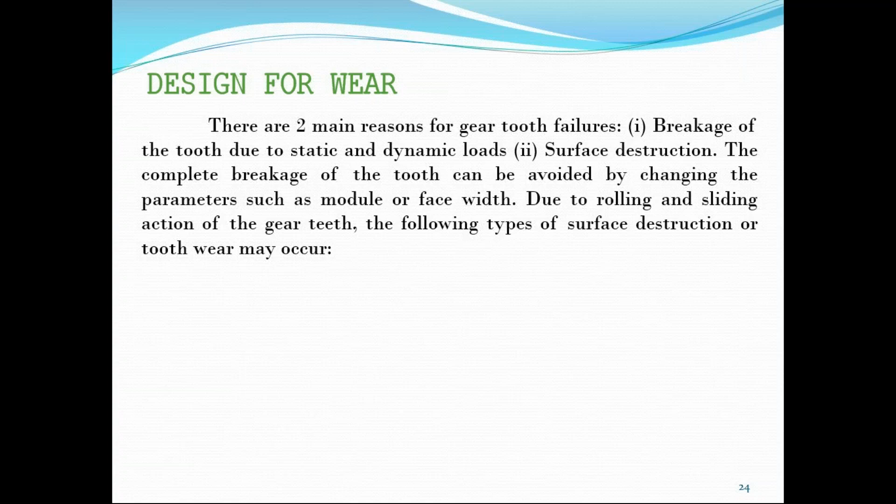So which are those things we will get? The first one is abrasive wear. This is failure due to the presence of foreign material in the lubricant that can scratch the tooth surface. This can be avoided by proper usage of the lubricant, meaning there should be no foreign materials.

Next one is corrosive wear. This is a failure due to chemical reaction on the tooth surface. This one also we can reduce by making sure that whatever lubricant we use will not react with the surface of the gears.

Next one, pitting. It is a fatigue failure due to repeated application of stress cycles. This is very difficult to reduce. And the last one is scoring, which is a failure due to metal contact caused by the breakdown of the oil film.

This one also we can reduce by changing the lubricant at regular intervals of time. But pitting is very difficult. So the failure of the gear tooth due to pitting occurs when the contact stresses between two meshing teeth exceed the surface endurance strength of the material.

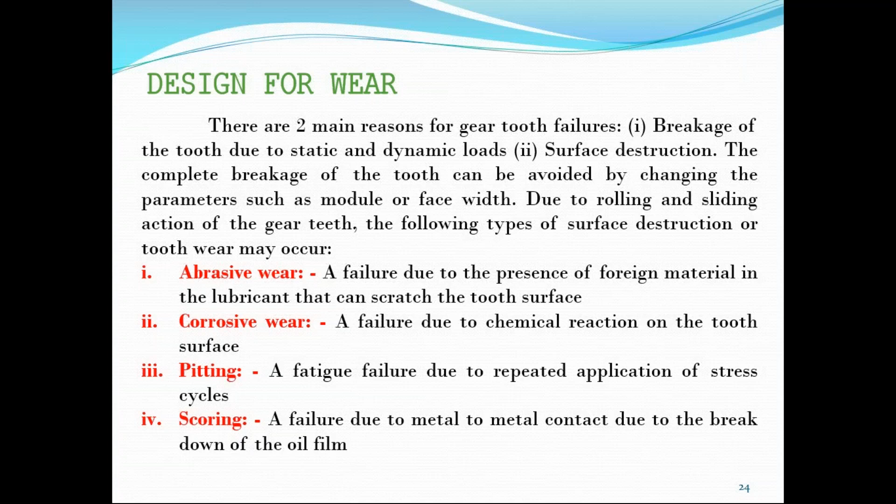So Buckingham analyzed the wear strength and gave an equation. According to Buckingham, for wear strength of the gear tooth, the equation is Fw equals D1 small b Q into K. I am using Design Data Handbook Volume 2 by Lingaiah. In that, this equation is 23.160.

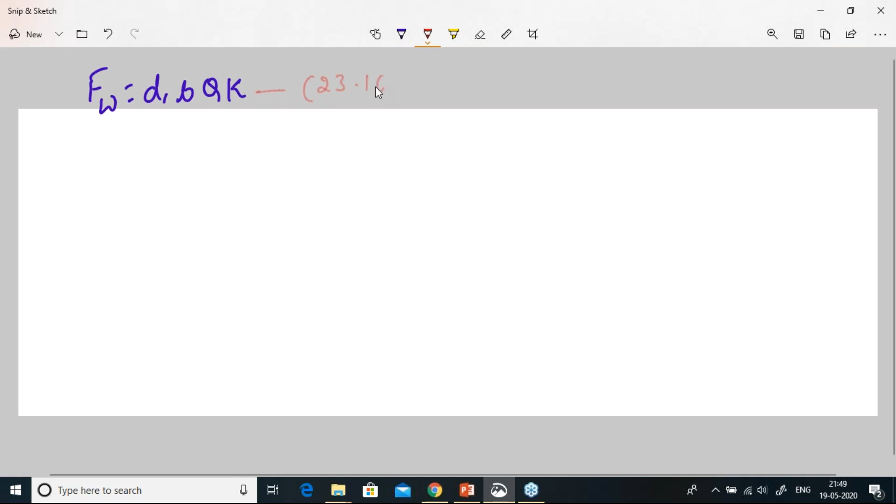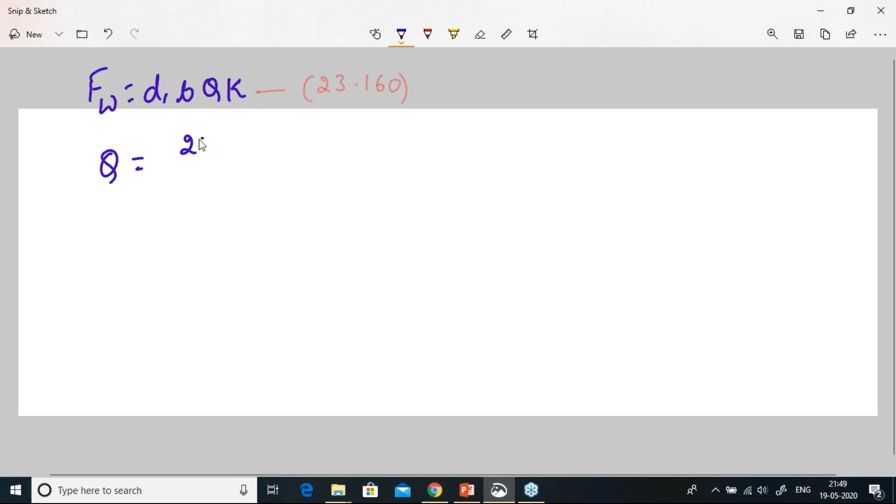In this, D1 is nothing but the pitch diameter of the pinion. Small b is the face width of the gear. Q is a ratio factor, which equals 2 times Z2 divided by Z1 plus Z2. This one also we have in the data handbook, equation number 23.163. Here Z1 is the number of teeth on the pinion, and Z2 is the number of teeth on the gear.

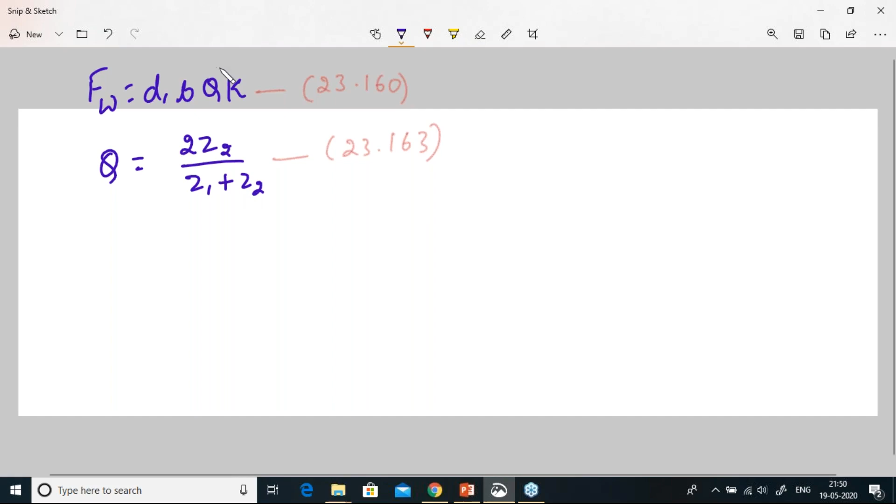Whereas the last one, K, is the load stress factor, which equals 1.43 times sigma FAC square into sine alpha, divided by E naught. This is equation number 23.161.

So in this, E naught is called the equivalent Young's modulus, which equals 2E1 E2 divided by E1 plus E2. This equation is 23.162. Here E1 is the Young's modulus of pinion, and E2 is the Young's modulus of gear.

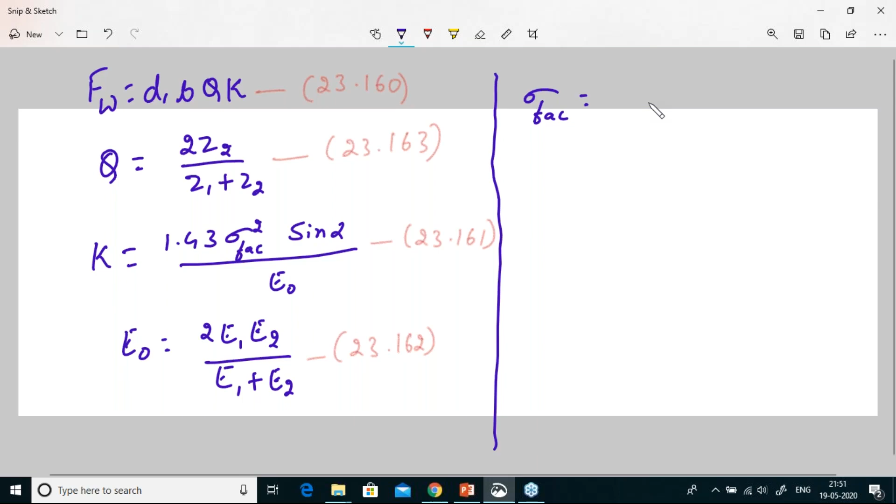Alpha is the pressure angle, and sigma FAC is the surface fatigue strength of the gear material. This can be calculated with the help of the equation 2.75 times H suffix B, HB, minus 70. This equation is 23.168.

So HB is nothing but the average value of BHN for the gear pair. By calculating all these things and substituting in this equation, we can get the value of FW. Always FW should be greater than FD, that is dynamic load. Always wear load should be greater than dynamic load.

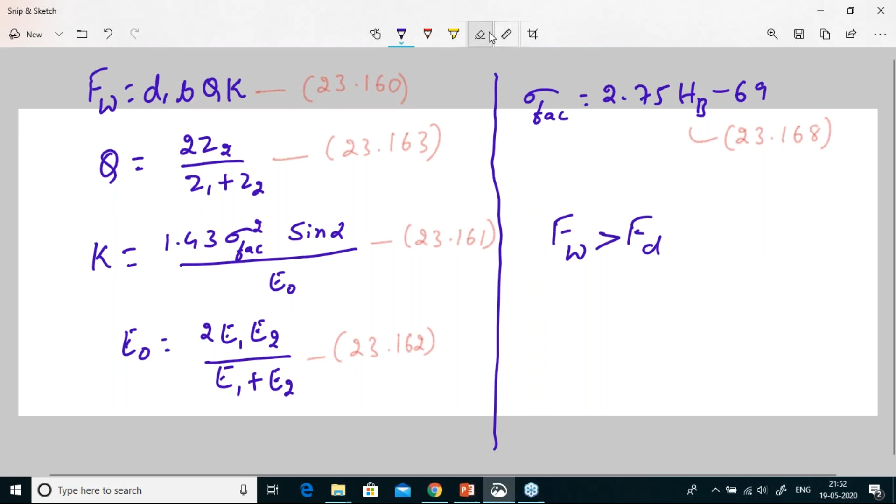If FW is less than FD, then pinion and gear materials are not hard enough, and we have to treat them properly to increase the strength of the pinion and gear. This is about wear load.

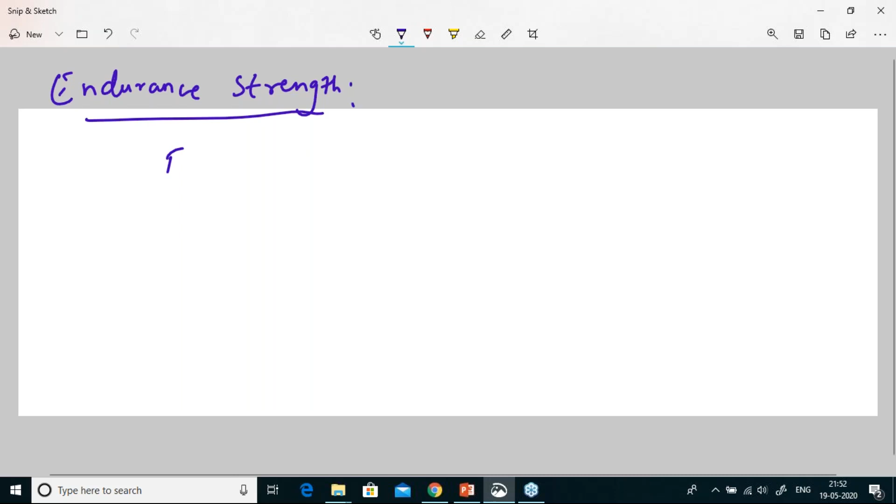Next topic is endurance strength. Sometimes we have to calculate the endurance strength of the gear tooth also. We have the equation FF equals sigma SF into small b into capital Y into small m. We have this equation as equation number 23.158.

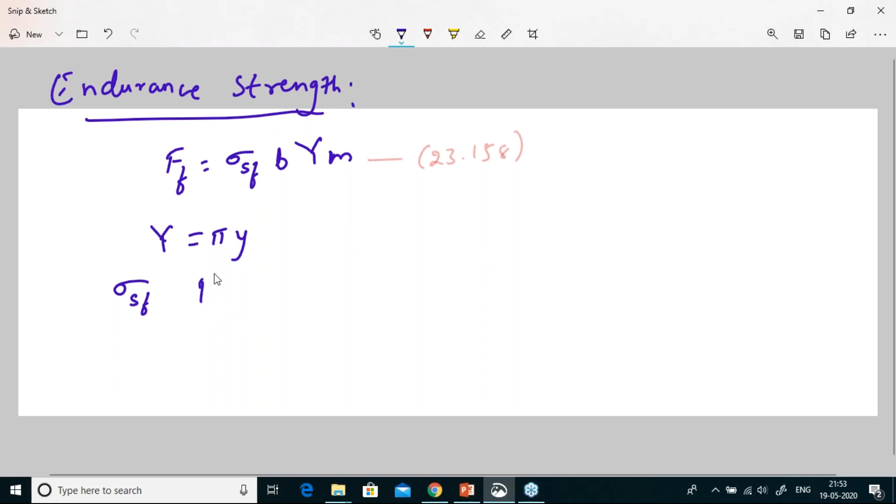In this equation, b is the face width, capital Y equals small pi into small y, where small y is the Lewis form factor, m is the module, and sigma SF is called the endurance limit of the gear material. If these are not given in the problem statement, we have to take them from table 23.33.

By substituting all these things, we can get FF, that is the endurance strength. Always this FF endurance strength should be greater than FD, that is the dynamic tooth load.

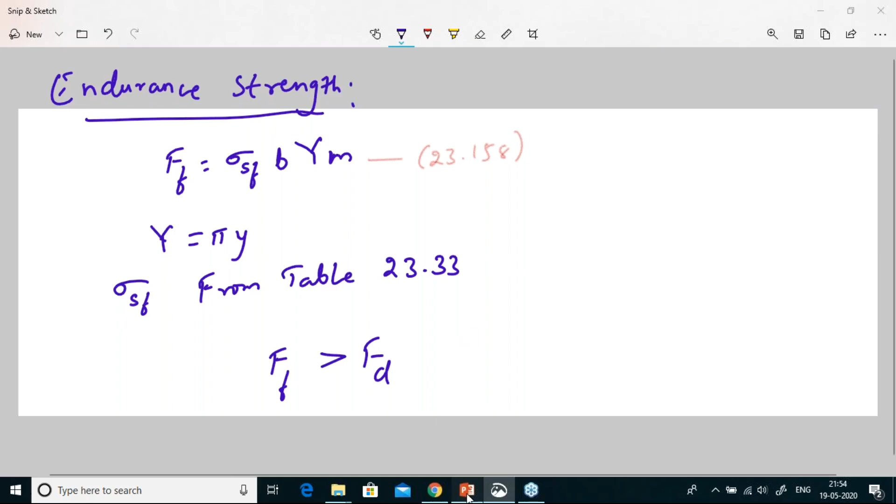Next topic, selection of material. How to select a material? The desirable properties of a gear material are: first, the load carrying capacity of the gear tooth depends upon the ultimate tensile or yield strength of the material. Endurance strength is the deciding factor if the gear tooth is subjected to fluctuating loads.

Next, the dimensions of the gear tooth are decided by wear rating rather than strength rating in many cases, because FW should be greater than FD. So we have to go for wear rating rather than the strength rating, that is FD.

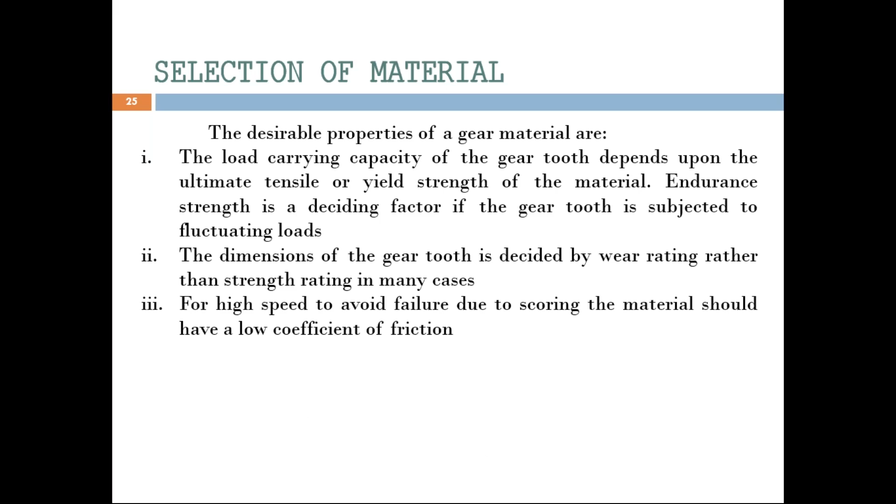Next, for high speed, to avoid failure due to scoring, the material should have a low coefficient of friction. To minimize the amount of thermal distortion or warping during heat treatment, alloy steels are preferred rather than plain carbon steel.

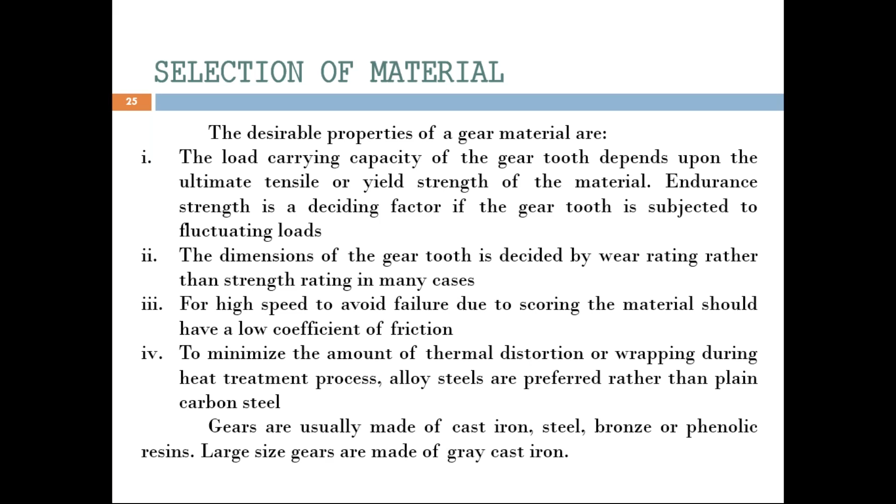Usually gears are made of cast iron, bronze, steel, or phenolic resins. Whereas if we want large size gears, then those can usually be made with the help of gray cast iron.

Next, design considerations. For the design of a gear drive, usually the following data will be given: power to be transmitted, speed of pinion or gear (also called speed of driver or driven gears), and center distance. So usually these three parameters will be given to design a gear drive.

While attempting the design of a gear drive, the following points should be taken into consideration: the teeth must be sufficiently strong so as to withstand the static loading as well as dynamic loading on the drive. Next, the teeth should have good wear resisting properties for their long life.

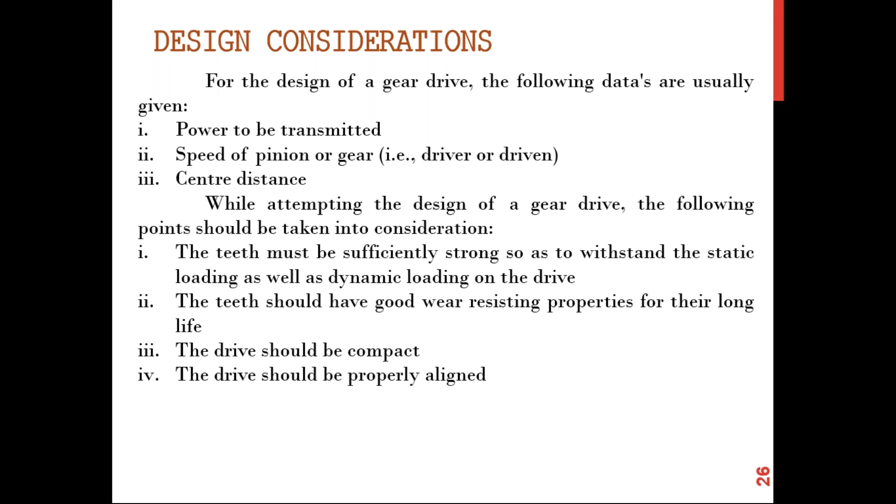The drive should be compact. So we can't design a gear drive of a huge size. We have to make it as compact as possible. Next, the drive should be properly aligned.

Next, the gears must operate without interference. The teeth must be able to resist tooth deflection, stress concentration, and accelerations. And the last one, proper lubrication arrangement should be made.

For this part, this much.